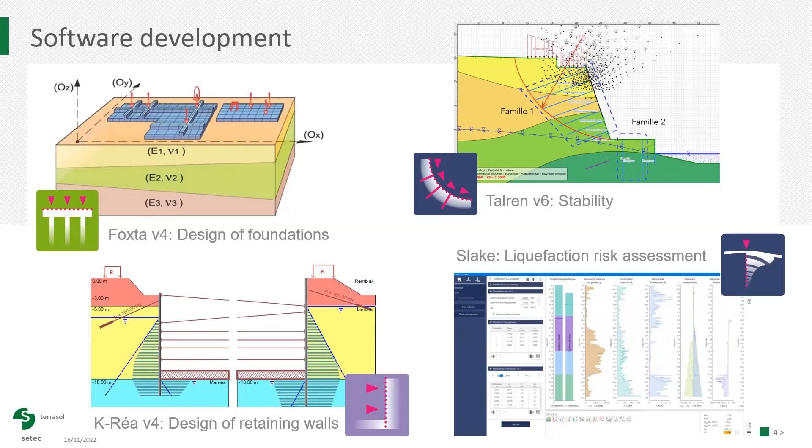This is something we develop because when we deal with the problems we study every day, we try to give innovative solutions to our clients, and step by step, sometimes we develop tools that later become professional grade software. For example, these 4 softwares that you see on the screen, we commercialize and offer to the professional community to study different geotechnical problems.

So today we intervene in different steps of geotechnical problems, mostly in design, but also in the reevaluation of existing structures. One of the main problems we need to address is the assessment of the resilience of structures that are part of critical infrastructures. So today we try to take into account more and more extreme external hazards. For today, I just focus on earthquakes, but as we heard at the beginning of the session, there is a broad panel of external hazards that need to be taken into account.

So if, for example, we take a look at a bridge that is part of a transportation infrastructure, dealing with extreme earthquakes, and it's an existing structure that we need to reevaluate, for example, to conduct a risk assessment. If we analyze the tools and approaches available today in the engineering world, not research, but what we actually do for design and reevaluation in a design company, we find two very different approaches.

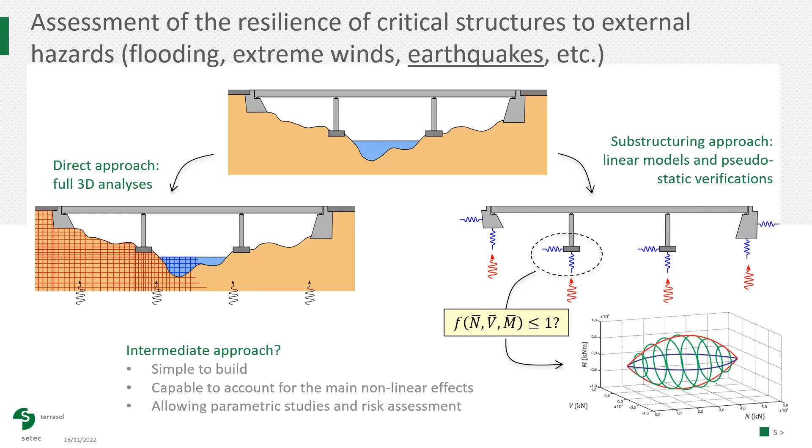And of course, if we want to do a risk assessment of the structure, we need to conduct parametric studies. So we need to have some intermediate models between the full 3D model and the substructuring approach that in theory doesn't allow us to go beyond the linear limits. This is something that in earthquakes, just to recall, I think most of you are already aware of.

There are some particularities because of the type of the loading in seismic. When we deal with seismic loading, the static failure doesn't imply seismic failure. When we deal with static and permanent loading, if we have an excessive load, that is going to generate a failure. Generally what we verify is that the safety factor is always higher than 1. But when we are dealing with seismic loading, if we have excessive load, that means that we are going to have permanent and irreversible displacements, but it doesn't necessarily mean that we are going to have a failure of the structure.

So we need to redefine the way we define the limits of this type of problem in terms of permanent displacements instead of safety factor. That is to say, we need new approaches that allow us not only to verify in a force approach, just in terms of safety factor, but to verify what are the displacements that are introduced when we apply this extreme load to our structure.

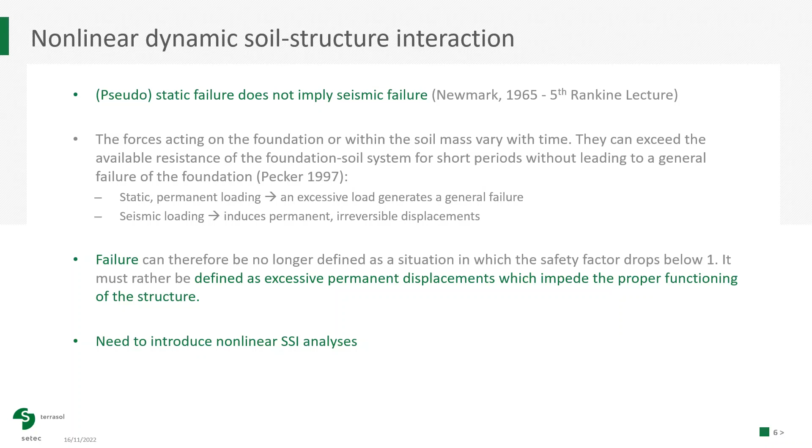So we need to conduct nonlinear SSI analysis, but an intermediate approach, not a very difficult or expensive approach. If we only have this type of approaches, we could not use it in most of the structures. That's one of the reasons.

Excuse me, can you hear me? Is it possible to finish the presentation in about 5 minutes? Yes, yes. We go over time a lot. I understand. Thank you very much.

Yes, so this is one of the reasons that has motivated us to develop a new in-house software. The idea is not that innovative, something that has already been done in the research community, but the idea here is to apply it to customary design of structures. So to model the structure in a simplified way, by means of stick models that allow us to take into account the response of the structure and the soil structure interaction. We can continue to model it in the classical way, for example by means of springs and dashpots.

And the newest thing that we introduce is all the nonlinear phenomena that take place at the interface between the foundation and the soil. In the case of a shallow foundation, that is sliding, the loss of bearing capacity, and uplift. The way we introduce that is by using what we call macroelements, which have been developed for shallow foundations mostly in the last 2 decades. There is a lot of research already available.

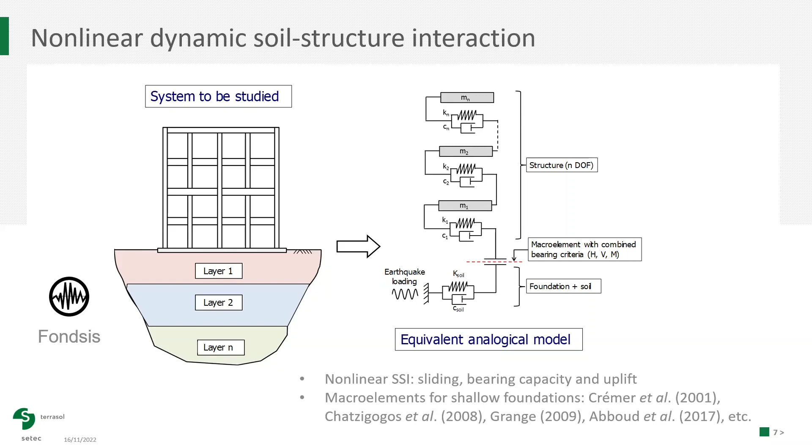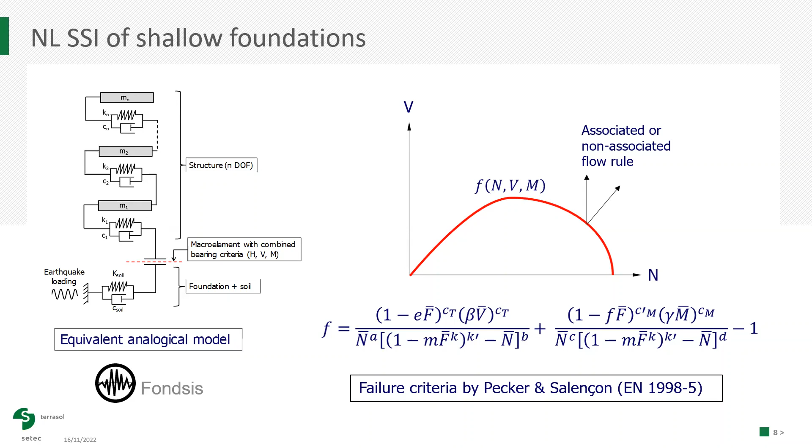When we look at the literature, we find that there are a lot of models offered, but they always need some calibration steps to calibrate different parameters. The only different thing we have done is that we have tried to use as much as possible the already available criteria, for example in design codes. That's the reason we use, for the bearing capacity, the same criteria given in Eurocode. For sliding, this is a simple criterion. And to model uplift, we try to model it as simply as possible. It translates to a nonlinear law relating the moment to the rotation at the base of the structure.

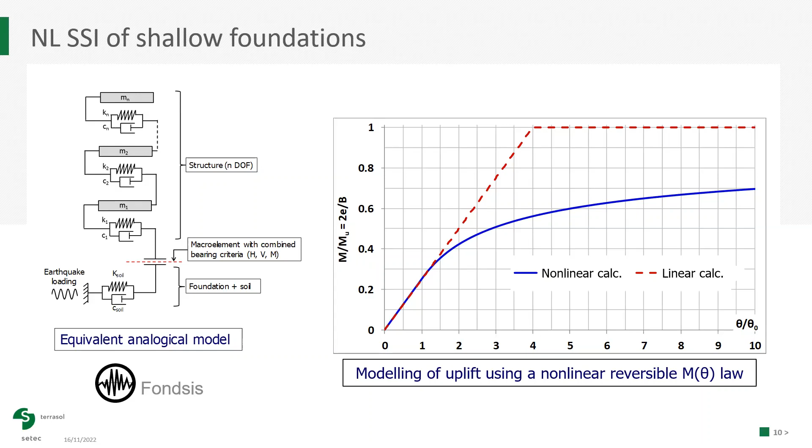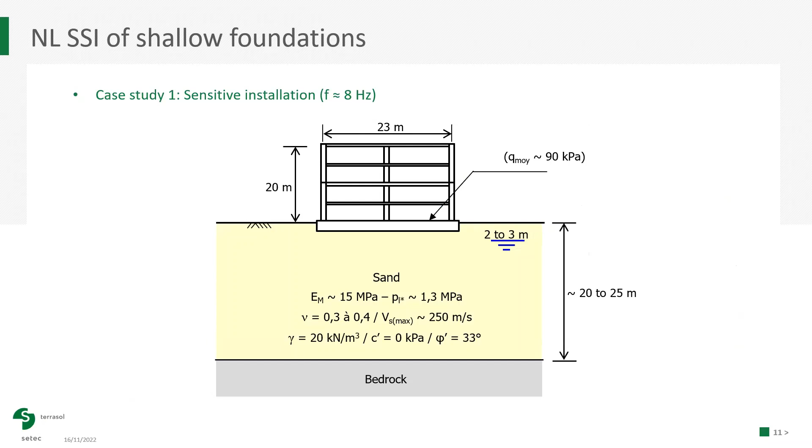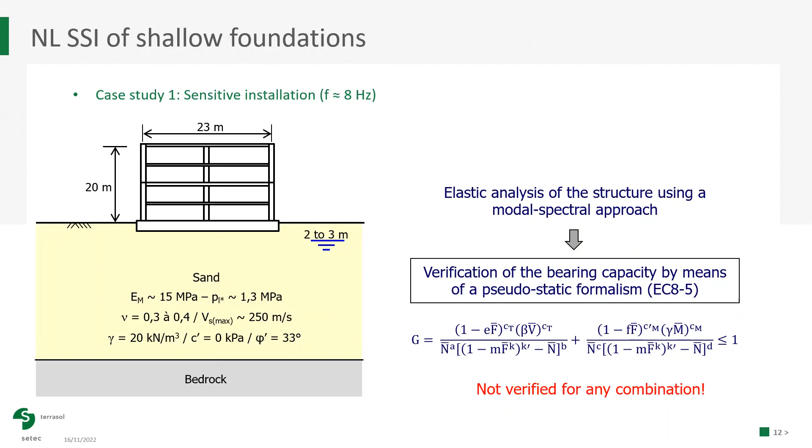These developments were done several years ago, so we have already had the opportunity to use them in some of our studies. This is, for example, the study of a sensitive installation in the nuclear industry, for which, when we conduct the classical force verification approach applying the criteria given in Eurocode, we cannot verify the stability of the structure. It doesn't mean the structure is going to be unstable. It only means that the structure, because of the seismic loading, is going to experience permanent displacements.

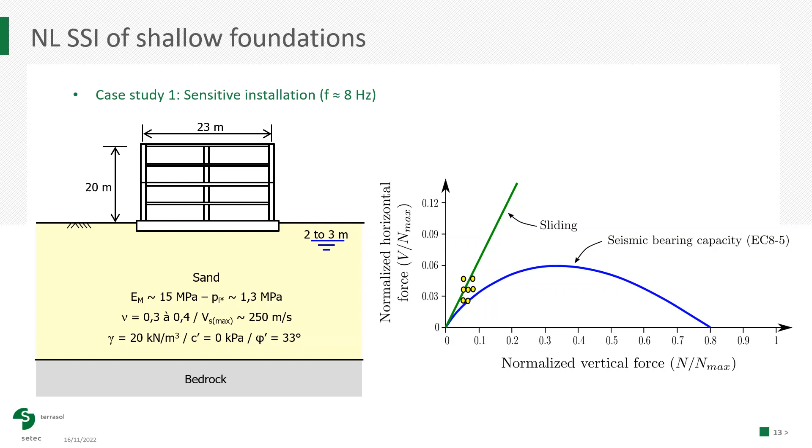So now that we have this type of models, we can conduct transient nonlinear analysis that allows us to calculate these permanent displacements. Here, for example, with no nonlinear phenomena at the base, we have this result, and when we introduce the nonlinear behavior at the interface between the foundation and the soil, of course, we experience displacements, and the main effect on the structure is that by construction it is going to isolate the structure somehow, because the interface cannot transmit a higher solicitation than the limit at the interface.

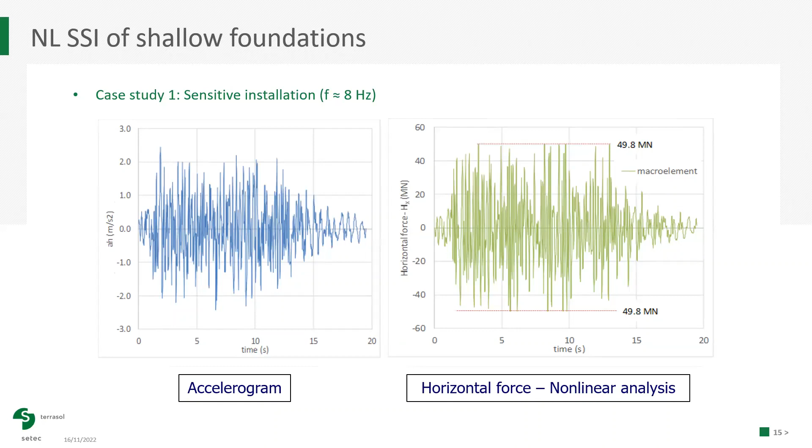And the only thing that needs to be verified is that the displacements that are induced by this loading are compatible with the structure. So in this case, for example, we observed displacements as much as 1 millimeter, which for this structure was, of course, not a problem. So we could verify that the structure was going to experience some displacements under seismic loading, but its stability was guaranteed.

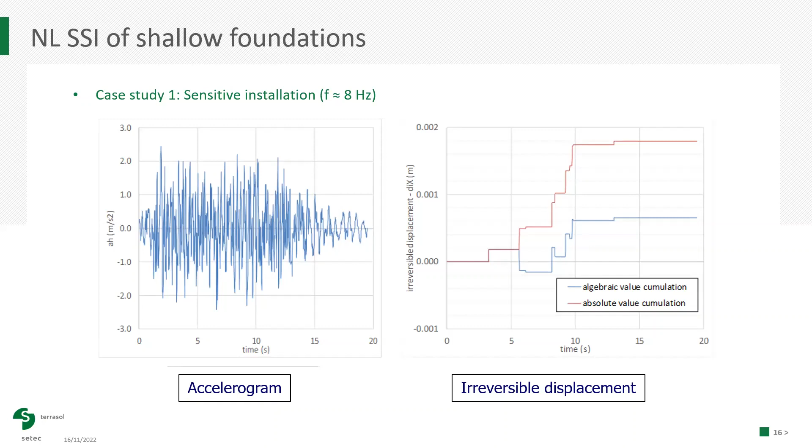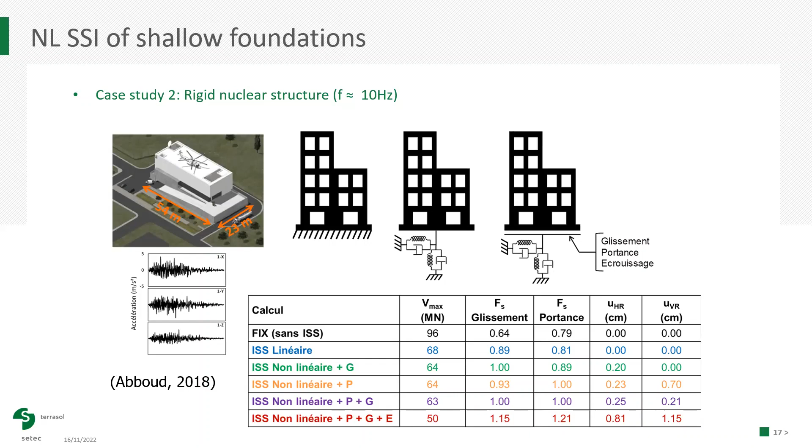So here, as you see, for the most critical case, if we introduce all the nonlinearities, the maximum displacement is around 1.15 centimeters, and we only have to verify that the structure is capable of admitting this displacement. This is for shallow foundations. We can find a lot of research today. So at this point, we were able to conduct the analysis for shallow foundations.

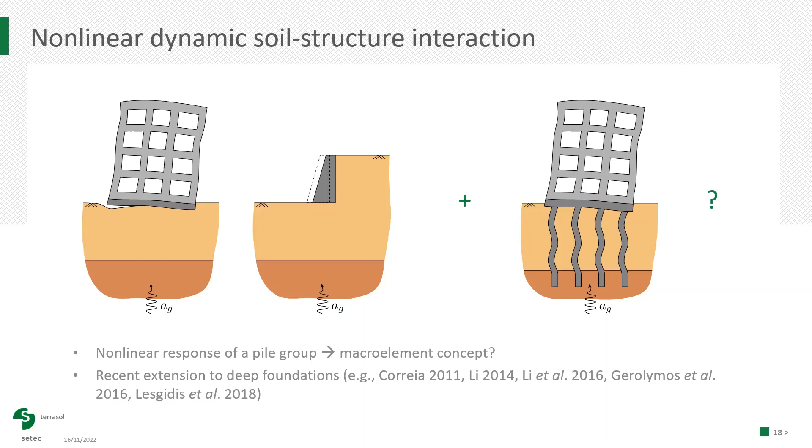So the question was, what could we do if we have deep foundations, pile groups? After a little research, we found that there were already some developments available in the literature, mainly in the last decade, which concern mainly single piles. So the idea is to introduce also a macro element, and in order to develop that, we started a PhD study.

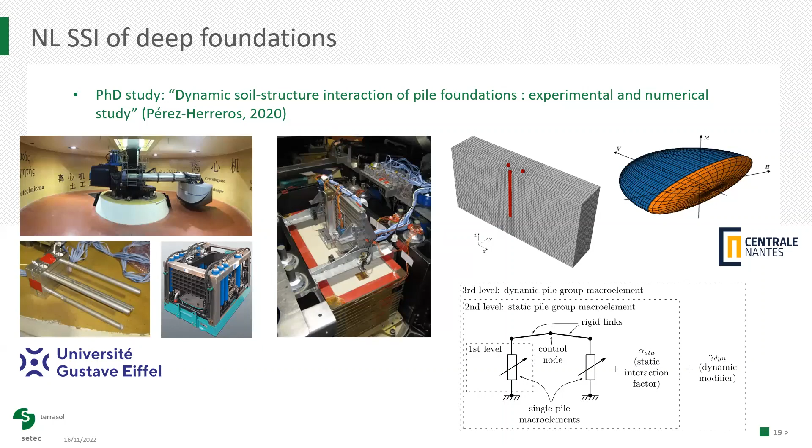The objective was to study the dynamic soil structure interaction of pile foundations and to combine an experimental and numerical approach to verify in the first step the nonlinear seismic response of this type of foundations, and then to develop a macro element. So we conducted experimental tests at the University Gustave Eiffel centrifuge that we compared to numerical simulations, and we used all this data to develop and validate new pile group macro elements.

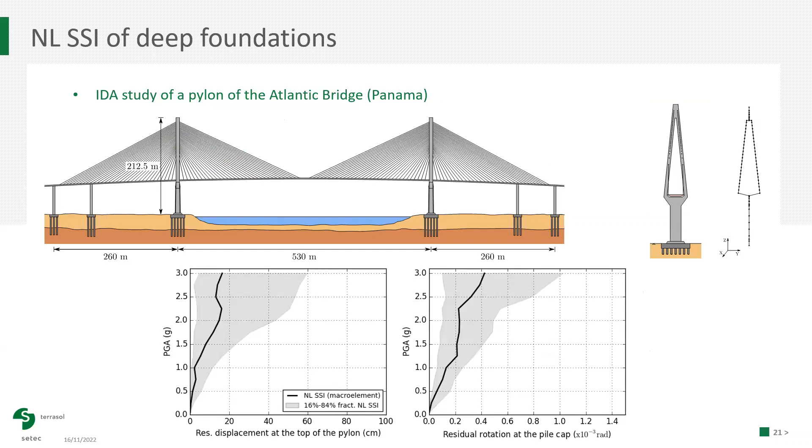With this new development, now the possibilities are open to study the response of different types of structures, to see how they evolve when we change different parameters. So we can conduct different parametric studies. I'll just pass very quickly. And today, the same question is asked for another type of foundation: structures that are founded on soil reinforced by rigid inclusions.

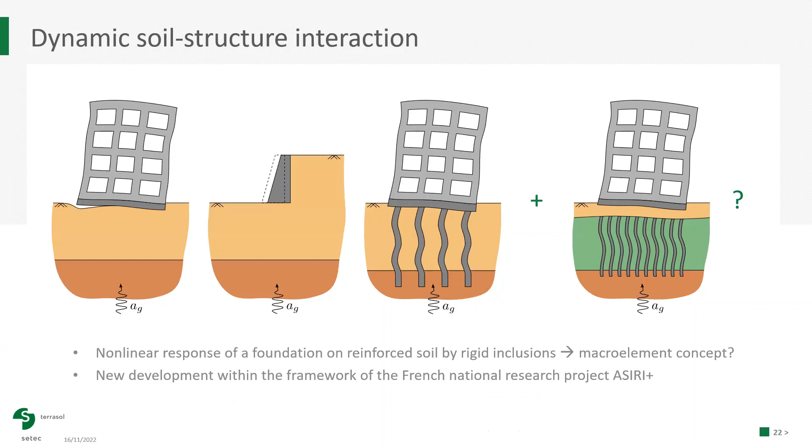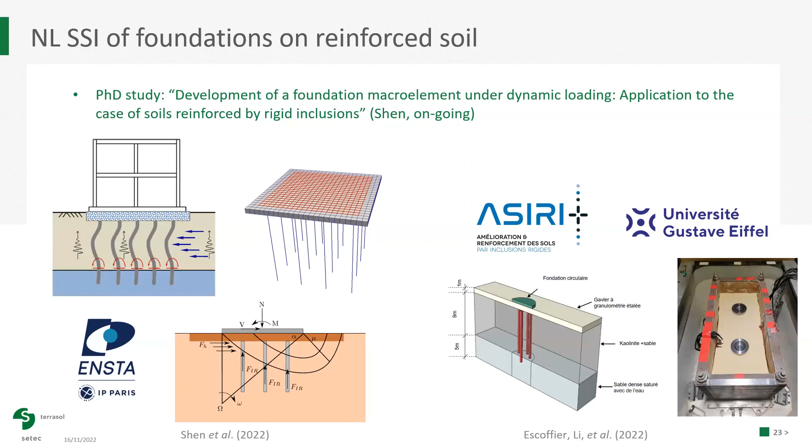So we have started a PhD study in collaboration with the National Research Project ASIRI+. The idea is to develop also a new macro element to take into account this kind of phenomena, and to validate this numerical and theoretical development and compare it to some of the experimental research that has already been taking place at the University Gustave Eiffel centrifuge within the framework of these research projects. So this is something that is ongoing today.

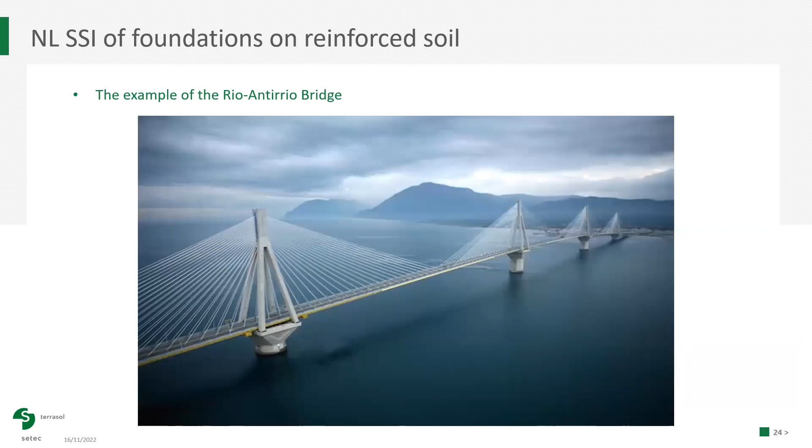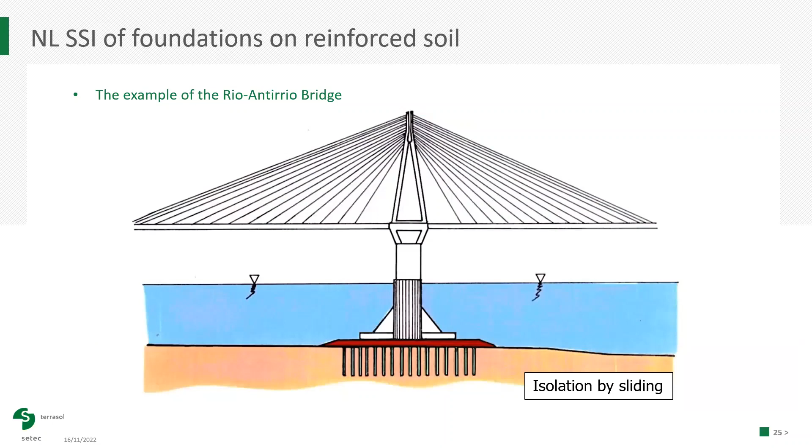And just to say very quickly, it's a concept that has already been tested and is already used today. For example, the Rio-Antirrio bridge, which was by design founded on rigid inclusions, and the idea was to isolate the structure by allowing sliding at the base. It's very interesting because the structure has already been subjected to an earthquake, and what you see on the screen is the displacement of the base of one of the pylons. As you see, it was designed for a displacement of 2 meters.

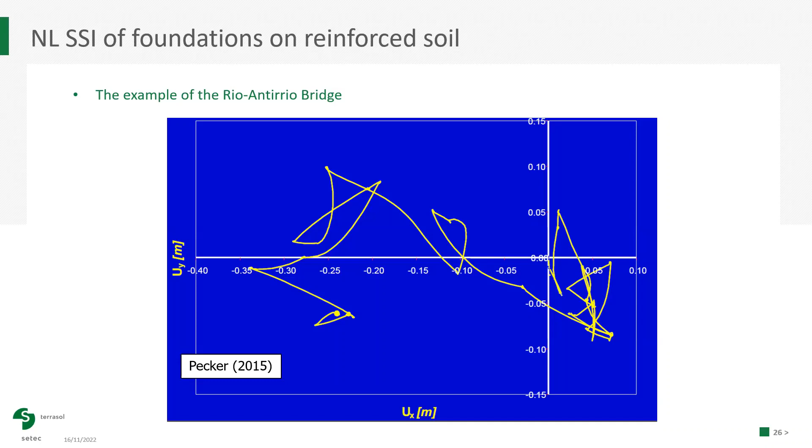So here you see that it has already behaved well. And the interesting point here is to highlight again that in the design studies, they also used an experimental approach to verify some of the numerical designs. Here was a test to verify the bearing capacity of the foundation, also conducted on centrifuge. And that shows the importance of combining experimental, numerical, and theoretical developments in order to develop this type of models.

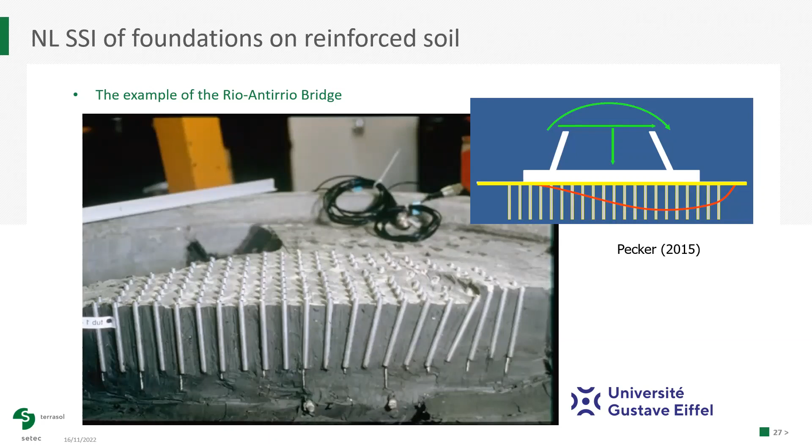And just to finish, if we see this problem from the design perspective, what we need today is intermediate approaches. If we want to conduct risk assessments of structures in design or existing structures, we need different levels of sophistication of the tools in order to be able to conduct parametric studies and see the importance of different parameters.

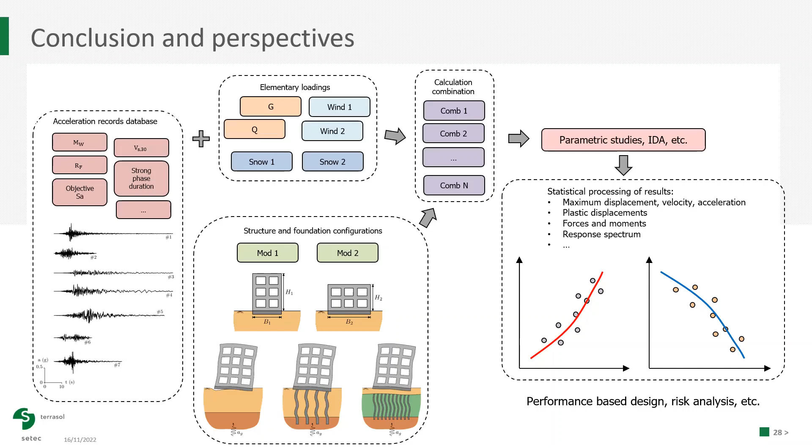Okay, thanks, Yanis. Just a quick comment. I'm Yanis Anastasopoulos from ETH. Thank you for a very nice presentation. As you know, the GeoLab project is offering so-called transnational access, and the next round will be on validation of numerical models. So I think that what you are doing fits like a glove to the next round.

So I would invite you to consider applying with a proposal to validate some of your numerical analyses with centrifuge testing. You will have to go outside France, I think, correct, Ton? Yeah. But Cambridge and also ETH do offer these capabilities. There are shakers, so if you would like to discuss anything more, please feel free to contact us.

Okay, I think that's also a nice conclusion for this workshop, because the whole point is trying to offer our facilities to innovations, especially from industries.